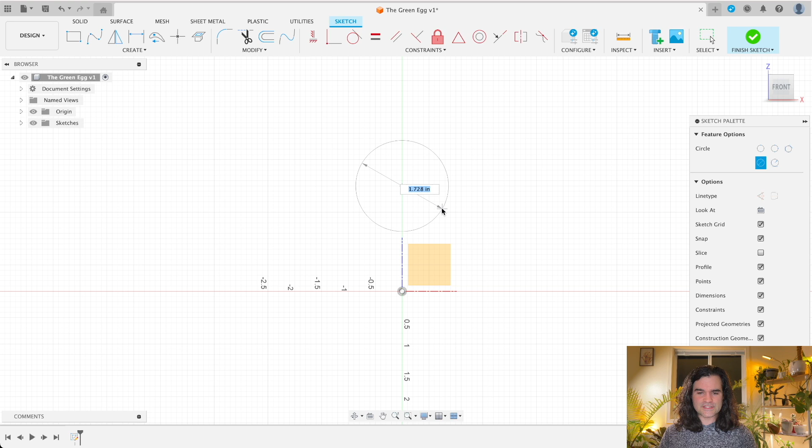The first thing that I'm gonna do is just put in two circles—this upper circle and then this lower circle—just to kind of build out the shape a little bit. I'm not really too concerned about the dimensions yet. This lower one I will put on the origin just to make it simple for us.

And then what I'm gonna do now is make sure that both of these circles are constrained to the center axis. That constraint will prevent it from being able to be moved around the design plane, and it's always best practice to try and keep things constrained if you can.

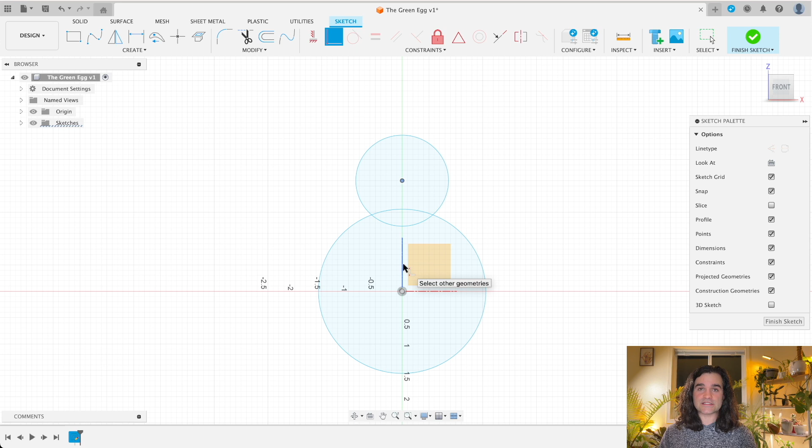So what I'm going to do to constrain this is click that center one, click this coincident constraint, and then just click this little blue line—that's that center axis we're looking at. You can see that changed this to a black dot instead of a white dot, and it gave us a little constraint icon there.

So now if we try and move this, we can't move it left or right, but we can move it up and down. Another thing we're going to do is throw in a line from the bottom of it to the top, and we're going to try and snap it as best we can to the center line, grab the bottom, come up here to the top of the circle, and get it to snap in there—that's what we're looking for.

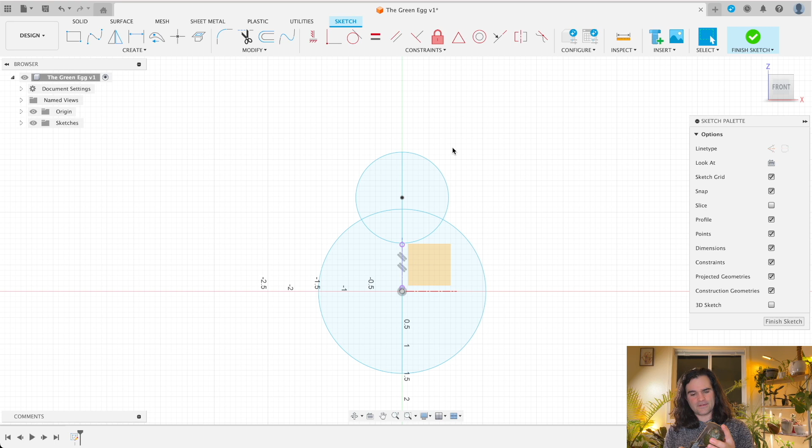And now I'm going to take my calipers and we're going to check the overall height of our green egg. We're looking at about 3.1 inches.

So I'm going to hit D for my dimension tool, and we're going to dimension this to 3.1. You can see it moved the top circle, but not the bottom circle. The reason for that is because the top circle was just constrained to the axis, and the bottom circle was constrained to the origin, so the bottom circle is not going to move.

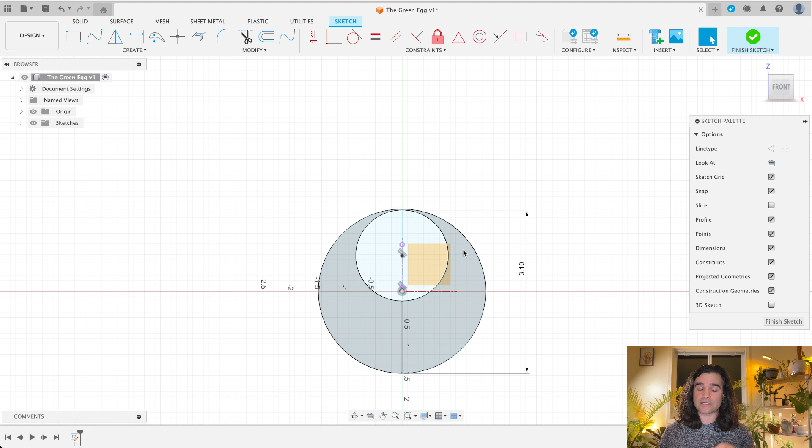And this one, you can kind of see, if we try and move it, it's just going to change the diameter. So what we're going to have to do is get the diameter for this lower circle.

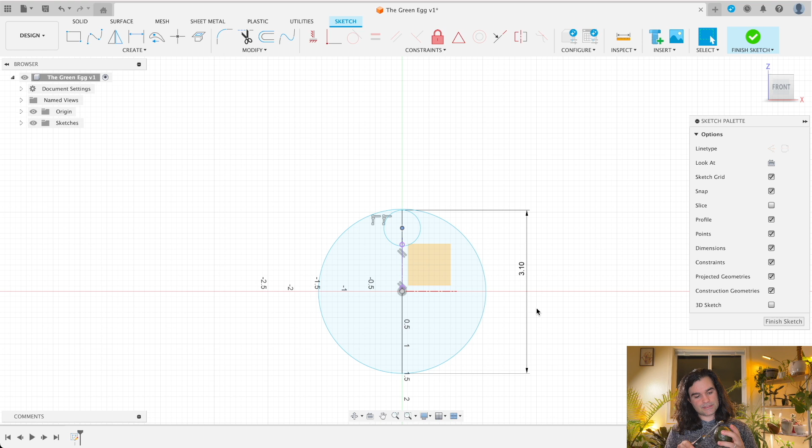Let's see what we got—we're looking at about 2.6. Yeah, about a 2.6 for that lower diameter.

So let's hit that D for dimension. We're going to click this outer circle—excuse me, let me get out of there, it snapped to the upper circle, but we just want this outer circle. Let's try this again. There we go, we're looking at a 2.6.

And then this upper circle, we're looking at about 2.1 as well. So I'm going to hit the D again for the dimension tool, grab that diameter, and set it to 2.1.

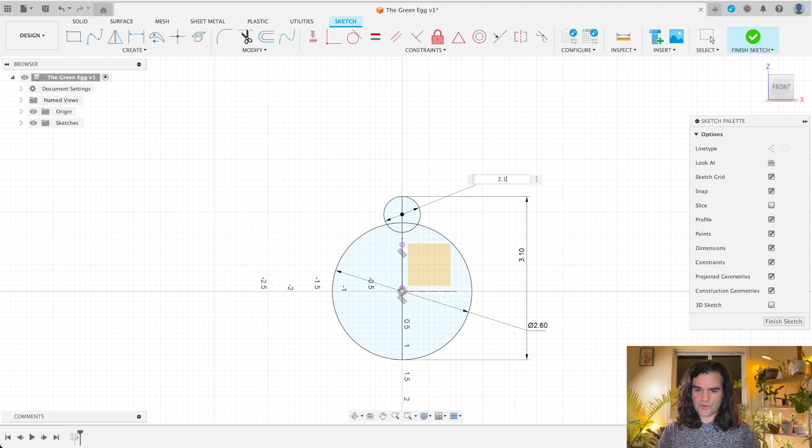All right, so now these are pretty close to where they need to be. The only thing we need to do is, you can see there's a gap right here. If you just did a straight line from here to here, it wouldn't have that rounded shape—it would be closer to an egg, like an actual egg.

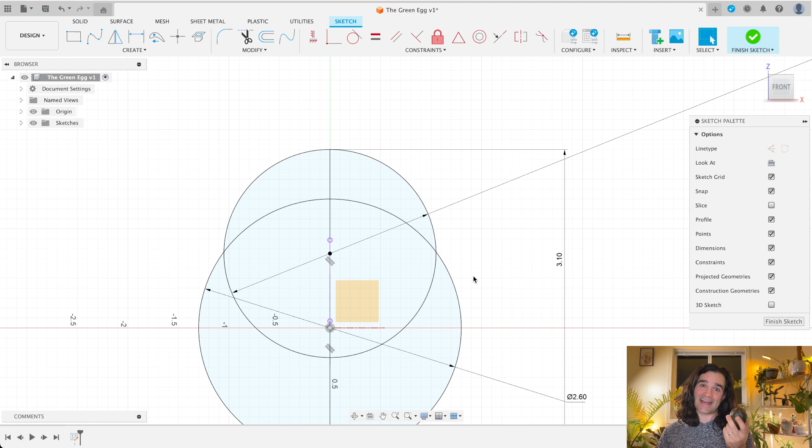So what we want to do is make this a curve, and there is a tool we can use called the 3-point arc. We're going to click up here, and click in just a general area for this curve.

And what I want to do is take this—you can see this is not constrained, so we need to make sure that we constrain that to this circle. When you're working with curved lines, one constraint tool that works really well is this one called the tangent constraint. So we're going to click that, click this top one, click this again, and then click this bottom one.

And what that did is it constrained it to the curvature of those circles, so it just makes a nice uniform curve going from one to the other. But you'll notice it's still blue, still unconstrained, so we need to get that constrained down. We can grab this farthest point and use coincident to constrain it to this axis down here. That changed it into a fully black constrained shape, and that's exactly what we want.

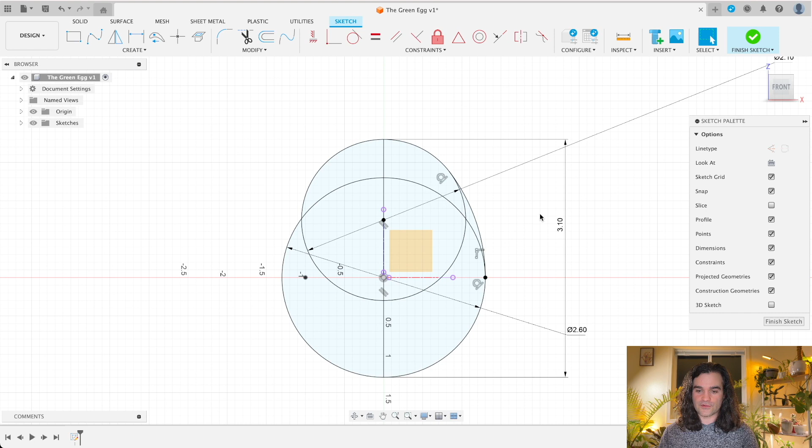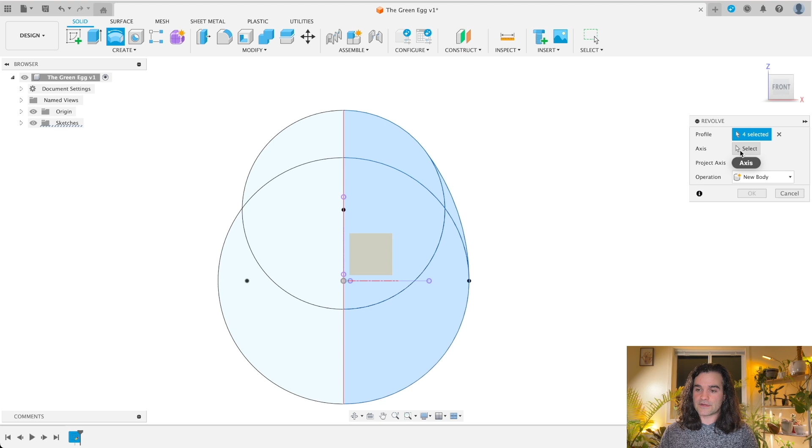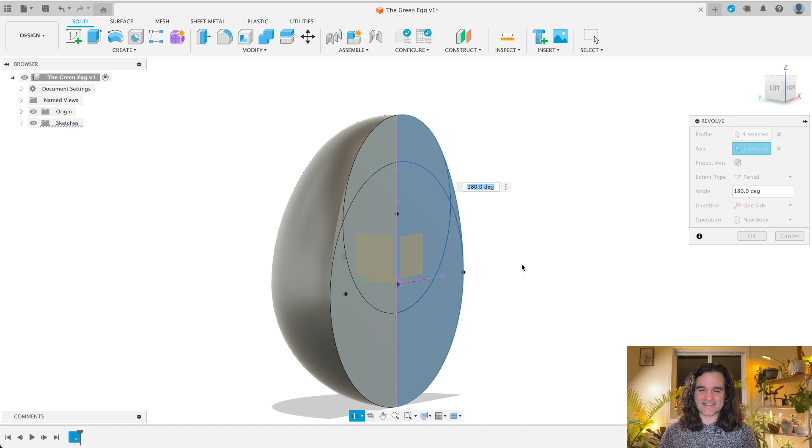We're going to use our trusty Revolve tool. Search REV, get that blue Revolve. Because we've got a lot of sketches going on, you could go back and trim it up for a cleaner sketch, but for this instance it's not too big of a deal. So I'm just going to manually click all the empty spaces I want to use as my revolve. For the axis, we'll do the center revolve. It's at 180, and I'm going to keep it at 180 because I want to design the center, the seed, and I want you to be able to see it because it can look pretty cool.

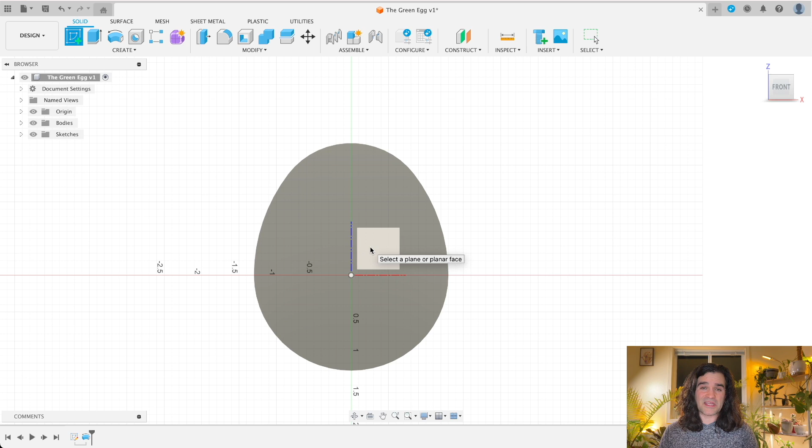Next I'm going to orient straight onto the front. We'll click Create Sketch, either on this body part or on the plane. I'll do it on the plane since it's right in the center of the outside of the avocado. I'll do a circle going right into the origin, and let's say 1.2, a nice even number. Same as before, we'll throw a line down the middle, making sure to snap onto the middle.

Then we need to constrain that line. Hit enter, and let's constrain one of these lower points to that axis. Now that is fully constrained.

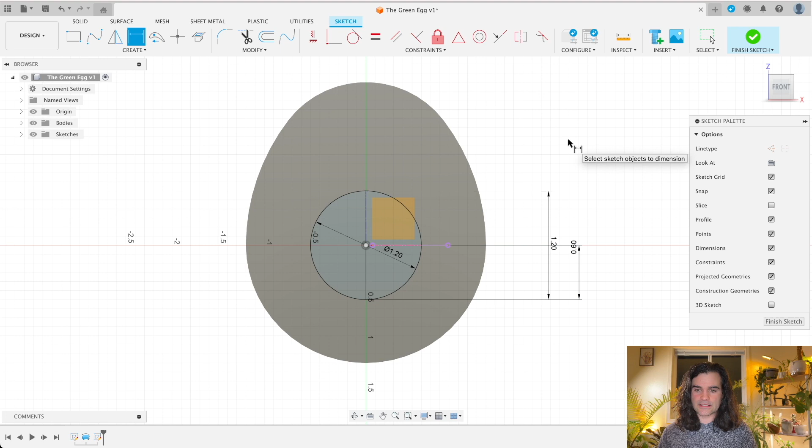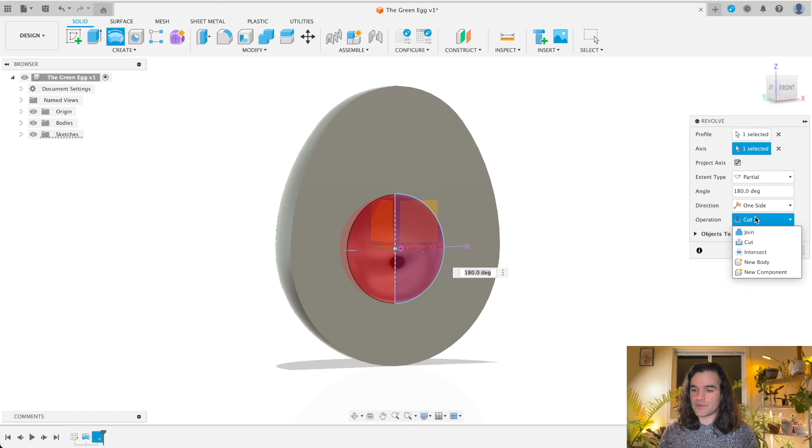Let's search for REV for the revolve, and click one of these sides. Click this center axis, and it's interesting, it turned red. That'd be kind of creepy if you opened an avocado and it had a red circle, but that's actually a cut function, which would cut out as if you were scooping out the inside of the avocado. What we actually want is to say new body. Right now it's still listed as 180, so we wouldn't be able to see it very well, so we're going to change this to 360 to get a nice full circle in there.

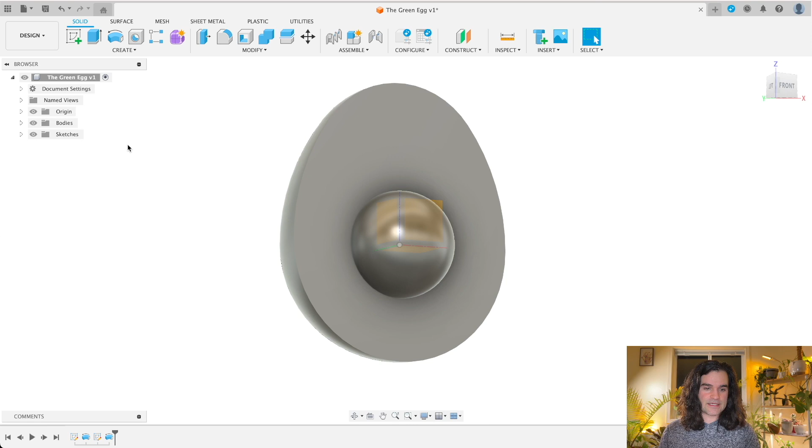So we're getting pretty close to the end of this design, and we're pretty much done with the origin, so we can get that out of there. Now our metallic avocado needs a little bit of color.

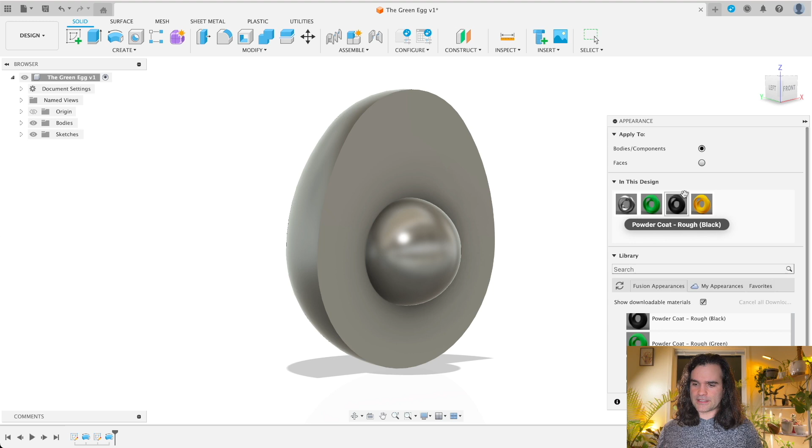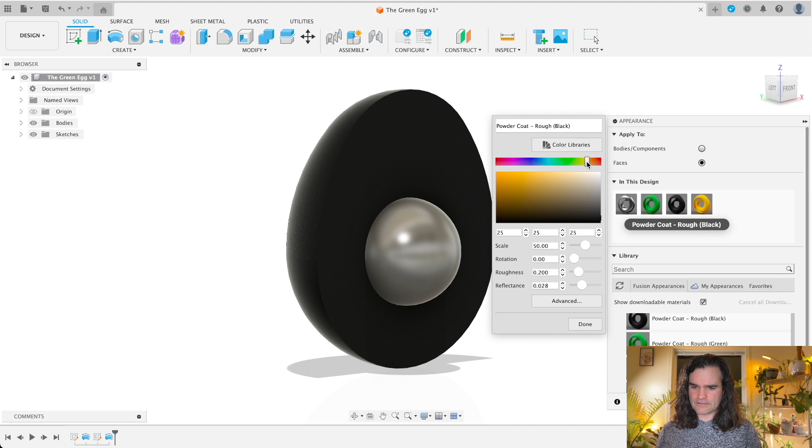So I'm pressing A to bring in the appearances, and let's find some materials we can use. This looks like a good one, this powder coat. Bring it up into our canvas area. One of the cool things you can do is change this to, let's see, bodies. We'll make the whole thing black for now, and change this around a little bit. That's very, very dark, kind of like a brown green. So let's find a nice brown green. It's starting to get a little bit green. That's a nice brown, all right.

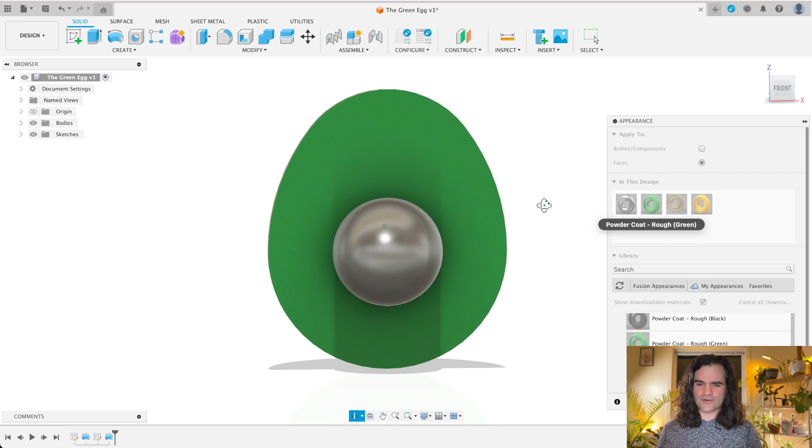And I changed it from bodies to faces because now we're going to go in here and change that one to green. But avocados on the inside are a little bit lighter than that, so let's double click and open that up to get a nice bright avocado. Nice bright green, it's almost yellow.

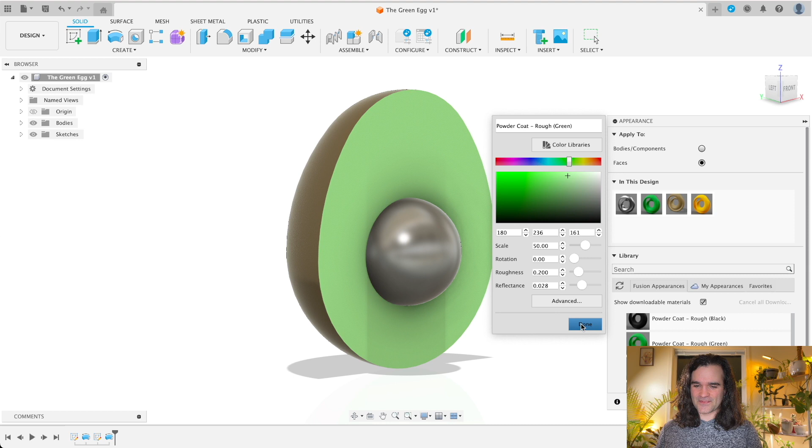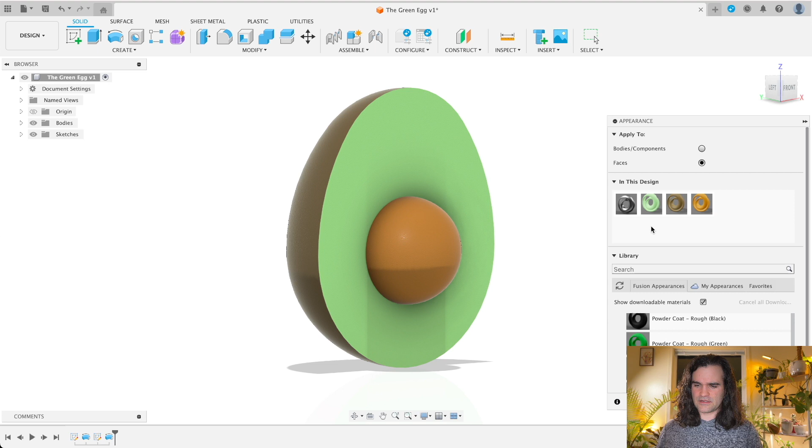All right, and then for this last one, let's bring that in for the seed. Seeds on an avocado are usually a darker brown. Let's try this out. That's pretty close, bring it down. Hey, there we go, kind of looks like an avocado seed. Let's make this a little bit darker so you can see the difference between that seed and the outside. Now it's got that nice powdered coat finish, almost like an avocado does.

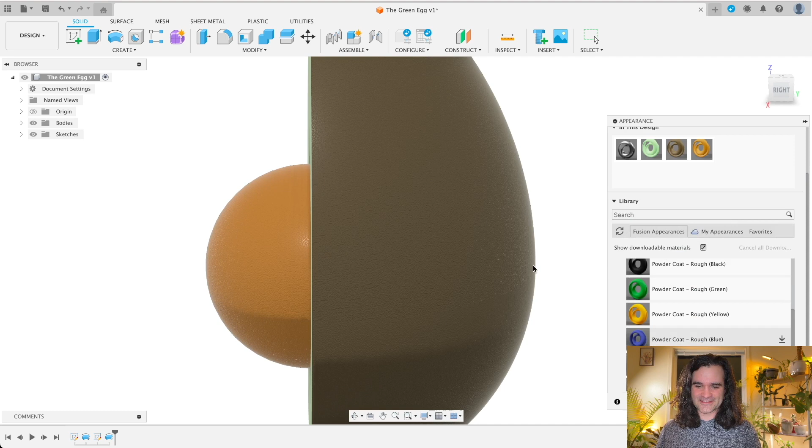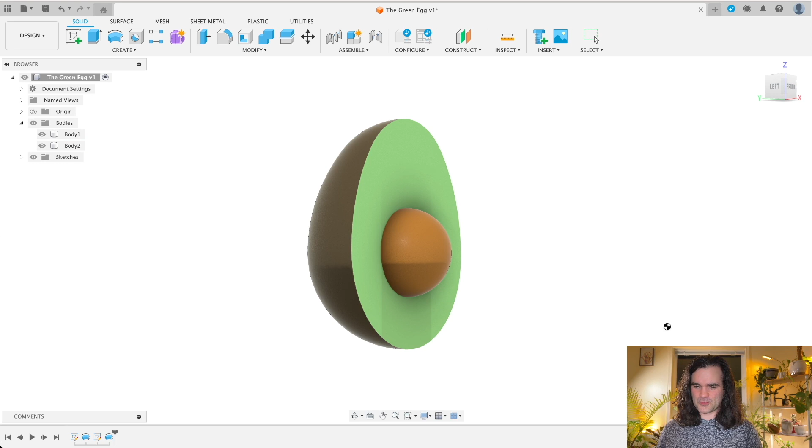Let's see if we can see that closer. Yeah, that's an interesting texture on the outside. But as you can see, we've got an avocado. If you wanted, you could hide that seed so you could see inside, or hide the whole thing. But that is pretty much our design for the day.